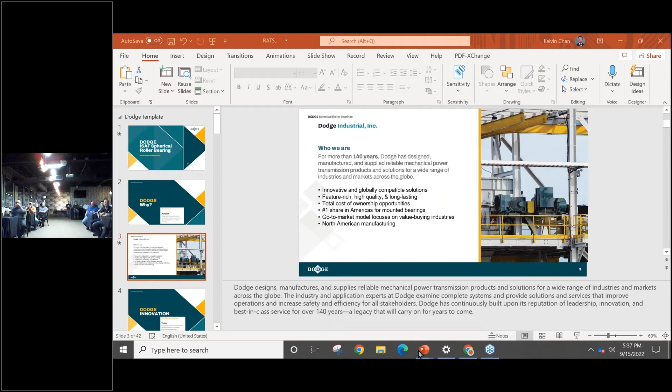Oh, we're gonna have some fun tonight. Bear with us for a second here. Okay. All right, that's better. Yeah, sure. I think it's on. It's on. So

This is who we are, and one important factor that really has to be stressed in the last few years is we're North American manufacturing. In fact, a lot of our plants in the US are within about a 2-hour driving radius. So that allows the plants to share knowledge, to be able to share equipment. And the majority of our products are sourced in the United States as well. So there's very few components that we have to put on a ship and bring into the US.

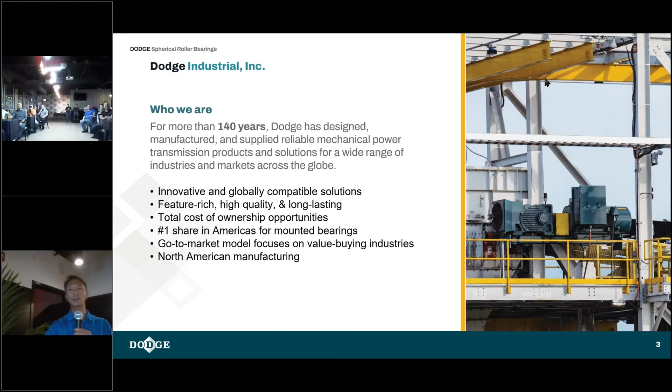So in the past couple of years, that has meant a lot. It's allowed us to be really prepared for some of the logistics issues that have occurred in the past couple of years. So we really take pride in the fact that we are a North American manufacturer. The other thing that we want to do is innovate. And this is another core belief that we have. We're always trying to improve products, yes, but we're also improving systems and ultimately offerings for our customers. And the goal again is our customers. We want them to perform at the highest level possible.

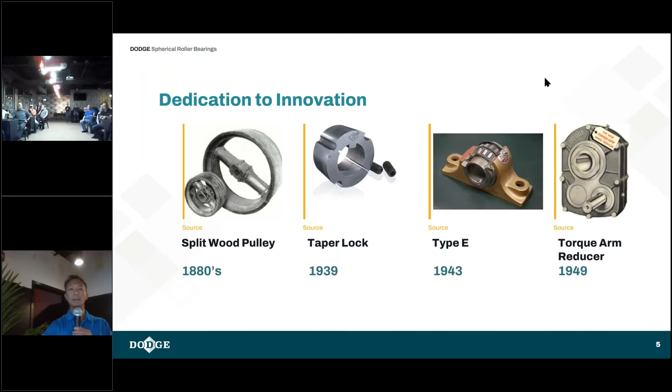A couple of the innovations that we've had over 140 plus years time span: Dodge created the first split wood pulley back in the late 1800s. And then in the late 1930s, we created the taper lock bushing. You see this in every sort of belt drive application throughout North America and around the world. So it's a really familiar product. In the late 40s, we created a shaft mount gear reducer. And on into the 60s, we created one of the first rubber tire couplings.

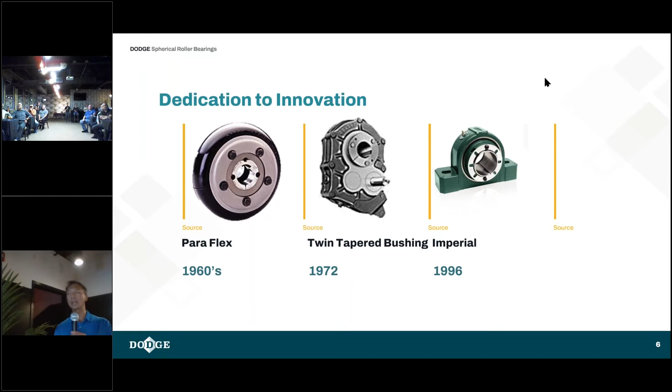And not to sit on our laurels, you know, we make a product, we introduce it, but we continue to improve it. So in the 1970s, for the gearbox that we introduced in the 1940s, we created a twin tapered bushing locking mechanism. So it allows you to take the shaft off really easily or install it. And then in the late 90s, Dodge in-house developed a new locking device for bearings, and it was the Imperial lock. And that's what we're going to talk about tonight.

In the past decade, we've introduced other products focusing on specific industries like the food and bev industry, requiring higher demand for safety and cleanliness. And we've even improved on our Imperial bearing that we came up with in the late 1990s by making the safety mount. And again, we're going to talk about that this evening as well. And not to say that Dodge is completely a mechanical company. We've dedicated resources to producing our smart sensor, which is a condition monitoring device.

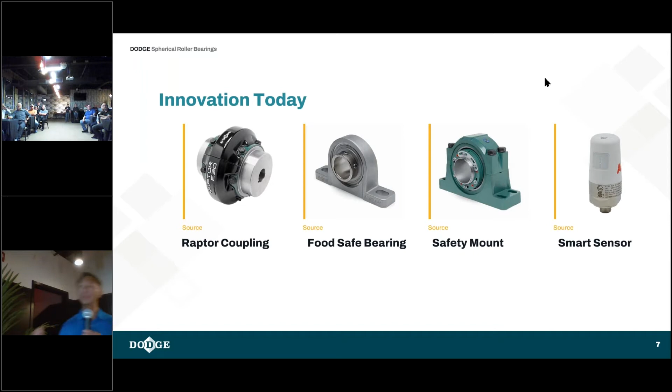And that's our entry into the Industry 4.0 sphere. So our spherical ISAF, what is it all about? Throughout your facilities, you'll see a fairly common bearing. It's called the SAF. It comes in multiple pieces. It's assembled on site. There's a lot of interchangeable parts with many different manufacturers, so it makes it easily accessible to the masses. But Dodge, we found a different way of approaching the same problem.

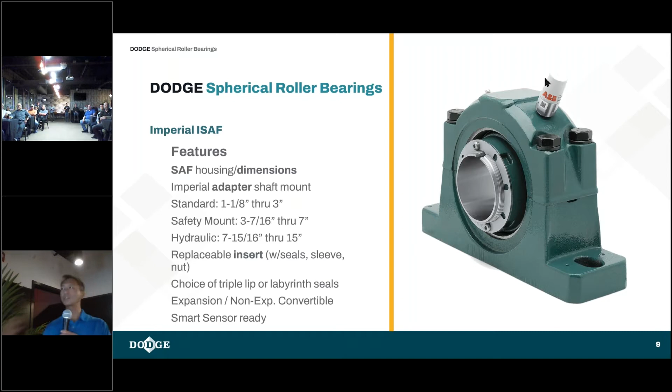So with the SAF, the ISAF, it's the same footprint, so it's drop-in. We've introduced that Imperial adapter shaft mount to it. We have a full range of shaft sizes that we can work with. And the difference in the product is it's insert base or cartridge base. We're going to get into that a little bit later on here. So I'm going to present 5 really good reasons that you would actually consider the ISAF mounted bearing.

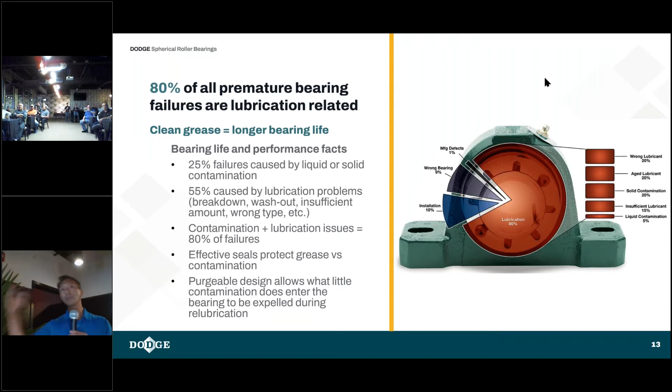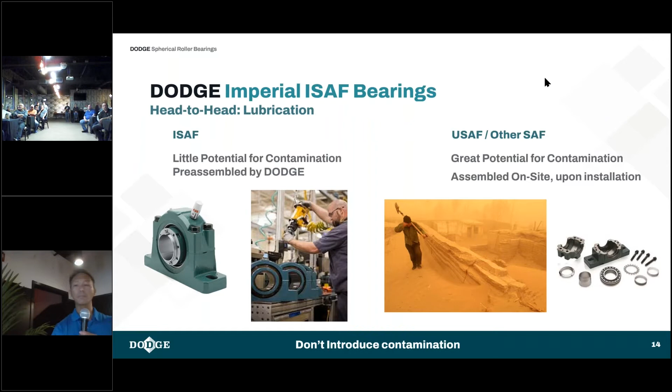Well, is this the environment that you work in? Does this look familiar? Maybe a little bit of an exaggeration, but not necessarily in some places. You have an open bearing you're working with here. So you're packing grease in that environment. What do you think is happening? You're introducing contamination from day one. Now, wouldn't you rather have something that just ships completely sealed, ready to go from the factory? And that's what the ISAF is.

How do we do that? Well, we want to not introduce contamination, number 1. Here's the other step. We want to prevent contamination after installation. Every bearing manufacturer lives and dies by their seals. And this is Dodge's approach. It's a triple lip seal plus a flinger. So that basically means 4 barriers of protection that restrict contamination from getting in. And in addition, there are other options for seals as well.

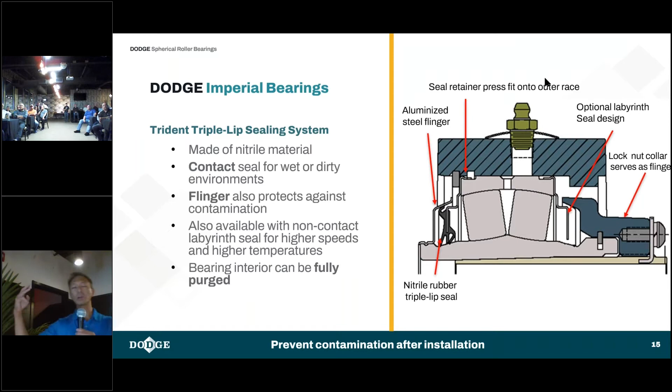But with this particular design, what we're trying to create is a grease dam. So you have these 4 barriers of protection plus the grease that you're gonna pack in here, right? So really the 5th protection is that grease dam. So you want to make sure that grease dam is clean, right? So now what's that 3rd thing that we have to do to prevent contamination? You got to find some way of actually purging this. So how do we do that? Well, in this graphic, you're going to see the difference between an SAF and ISAF in how contamination gets in or gets out.

So in a traditional SAF, what you're looking at here is the housing of an SAF. There's a massive cavity on either side of that bearing inside there. So when you're pumping in fresh grease, it's a shell game. You're actually just moving the contamination over into this cavity. And then to add a little bit more pain, those LER seals are grooved. So you're moving more contamination into the groove now. So as you can imagine, how much contamination are you actually pushing out of this particular type of bearing?

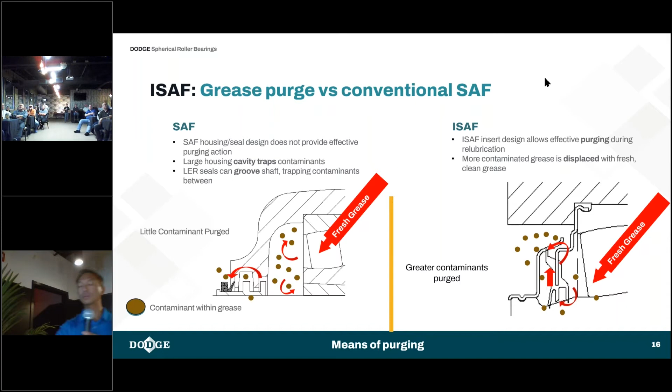Now, compare that with our ISAF. So it's insert base. When you purge grease, you notice the shape of those seals are fairly unique. It's a one-way street here. We're pushing grease, it goes out with the contamination, and everything that's going with that grease is purged out. And that's what we want to do to properly maintain the life of that bearing.

So how is it that we can do this? Because as you can see in this picture, you can see that grease being purged out. It's rotating. You know, that's pressurized. We're actually using some means of pressure to actually push that out. And normally with a lot of bearing seals, you apply pressure to any seal and it's popping out. That is traditional seal design. Why does this happen with Dodge and that seal is staying intact? It's not popping out. Why is that?

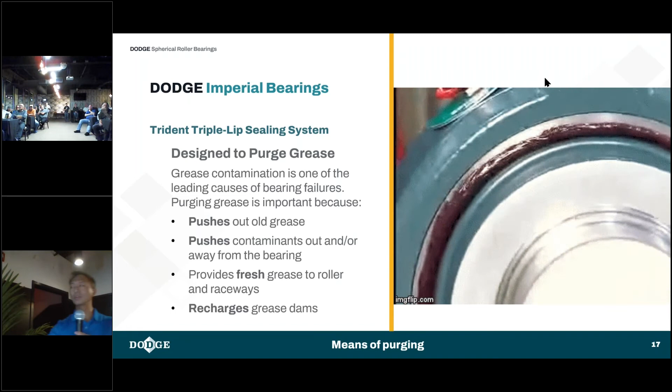It's because the seals are mechanically retained. So no human hand is actually touching that to insert that into the housing. It's a robot that does that. It pinches the seal so that you can apply whatever normal pressure that you would, a grease gun, an auto lubrication system, whatever it is, you're pushing that grease out with its contamination. You're getting that fresh grease, and you're getting that fresh grease dam as well. So those are three things that are related to lubrication that really restrict contamination with our design.

Oh, by the way, let's talk about how much grease you're going to use. The factory knows how much grease fills that insert, and they're going to get exactly the right amount all the time, right? So in the field, when that SAF bearing is open, what are you doing with the grease? So you're buying 5 times the grease to actually pack this thing in that exposed contamination-based environment.

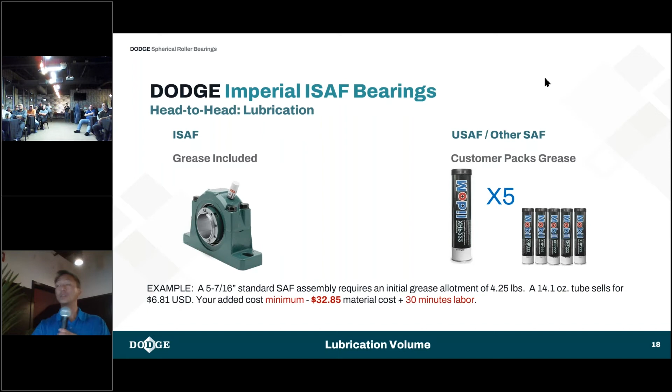And you know, the funny thing is, I would hope the first thing that you do after you pack all that grease with all that crap is you're purging it out. Does anybody do that? That's not the first step. So realistically, you could be spending 10 times as much grease to actually make sure that you're doing it right. So what other things should you consider an ISAF for?

When that panic happens in your plant and you're scrambling for these parts, you will work with anything you want, right? Or anything you can get your hands on, right? So you're going to get a mishmash of all sorts of different manufacturers. So there's an inherent risk in doing that, where you can't be confident necessarily in all the components that you're choosing to be part of this bearing assembly.

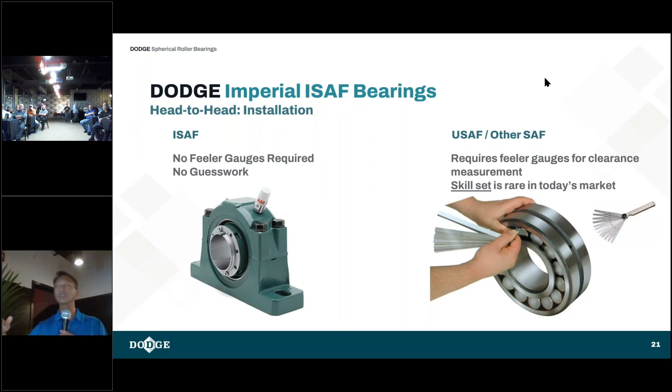What's another good reason? How about this? It's easy to install. You guys know what feeler gauges are? How many of you have actually worked with feeler gauges? Yeah? You have a skill set. If you've worked with feeler gauges, you have a very particular skill set. And it's an absolute rarity to know how to do this effectively, properly, right? So ISAF bearings, no feeler gauges. You don't have to stick those feeler gauges in here. I'll show you how to take the clearance out of these things.

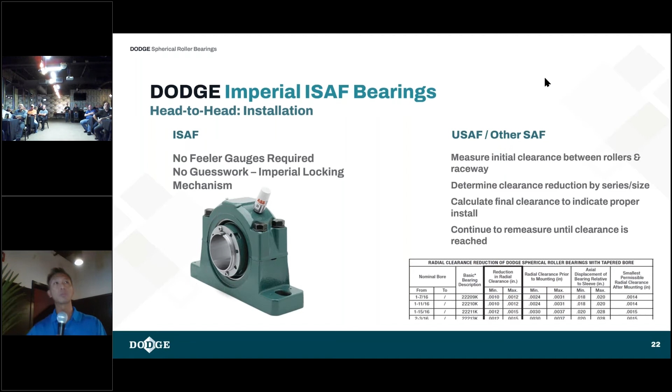These are the steps. There's 4 steps to making sure that you take out clearance, check the clearance, etc. And these 4 steps, you may have to repeat them, right? If you don't get that clearance out, you're going to have to repeat this, right? And as the bore, the shaft size gets larger, it gets a little bit more difficult to do this process. You require more people, you require more time, right? So how do you install a Dodge ISAF?

Turn something clockwise. That's it. That's all you're doing. In fact, you're hand tightening it to a 0 reference. And then I have a chart that tells you whatever diameter it is, you put it through a couple more turns, either with a spanner wrench that has leverage or a hammer and drift. That's how you mount it. No feeler gauges. This actually takes the clearance out, sets it for you perfectly.

And how does that happen? Well, if you focus on the blue wedge there, when you hand turn it, I don't know if the graphic's going to work for me today, but when you hand turn it, oh yes, it moves, right? It pushes.

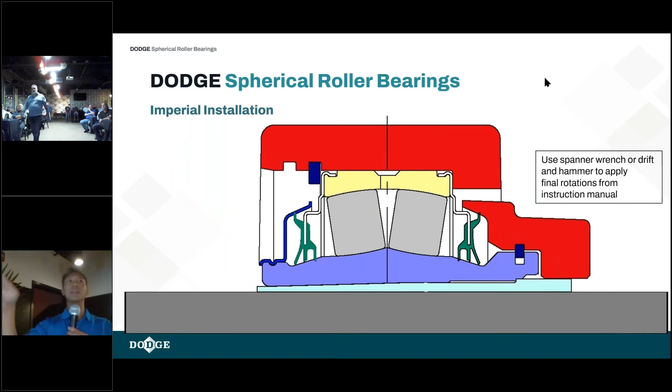And then when you use that spanner wrench or hammer and drift, you're locking it into place. Oh, see what happens? Okay, we'll back it up here. So what happens is it pulls. So that's why we call this a push-pull adapter. That effectively sets the clearance for you. You don't have to worry about feeler gauges.

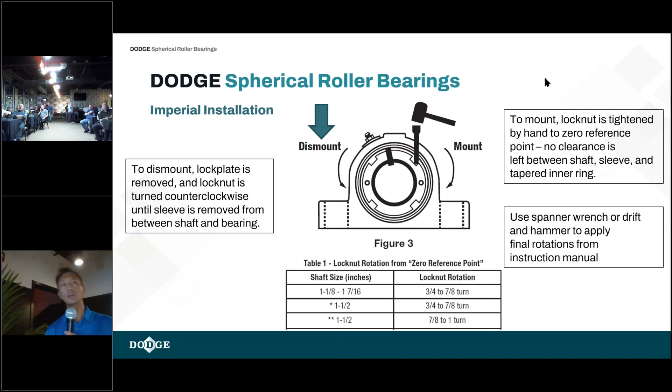Another good reason: just as easy as it is to mount, it's easy to dismount as well. With traditional SAF bearings, there's a real challenge with dismounting these bearings. So how do we do it with our ISAFs? Counterclockwise, same process. This is one way to remove an SAF bearing. Don't know if the sound will go through, but

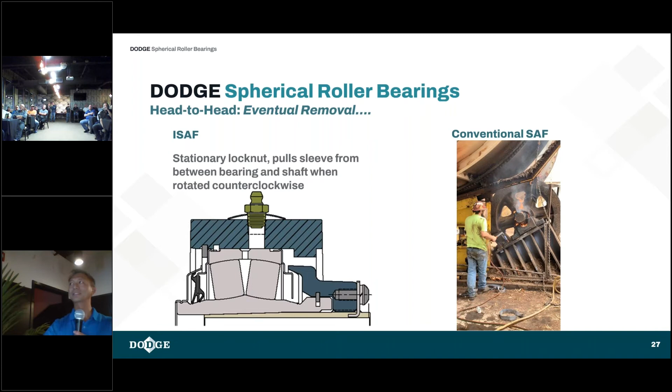So how many of you have actually seen that before? Yes? Winner. Yeah, you may have done this yourself. In a facility, what does this require? You're going to need some sort of permitting, right? This is hot work, right? You're going to need time. You're probably going to need a new shaft after you do this, right? So look, with the ISAF, this isn't how you dismount. This is a lot easier to work with, right?

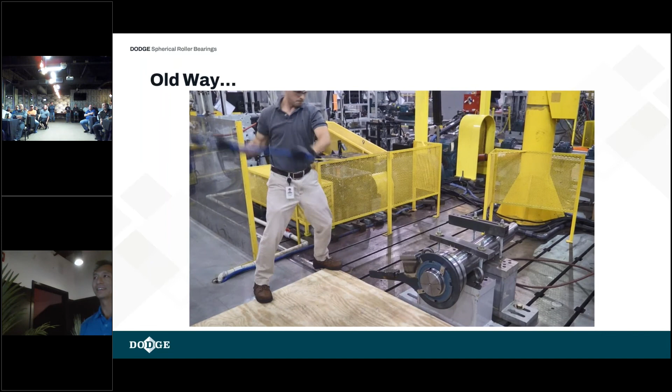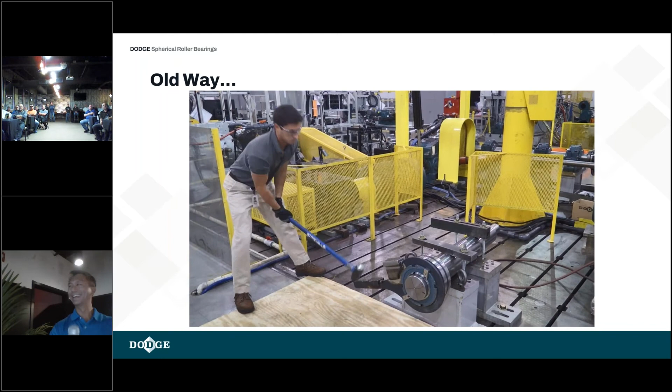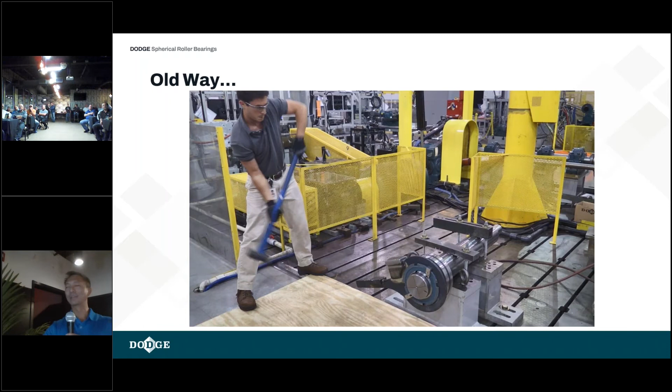Here's another nice little video you can see. Have you seen this? That's too painful to watch completely, so we'll just cut it short there. This is another way of unlocking that adapter from that shaft, right? That's usually the first resort before you take that torch out.

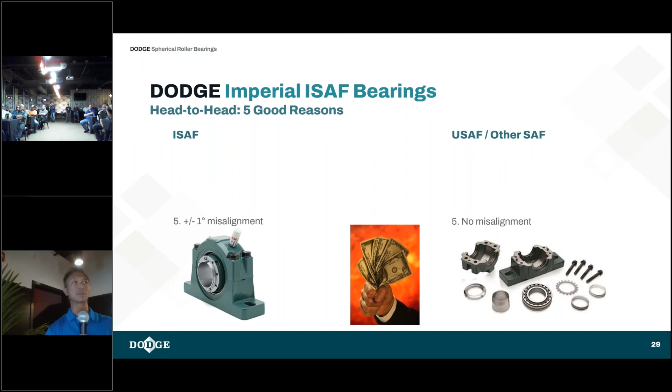Another good reason I'm going to share with you. Last one. This is about misalignment. So with the ISAFs, there is plus or minus 1 degree of misalignment. We all live in a perfect world. No such thing as misalignment, right? Right. So when you're working with an SAF style, there is no capability for that seal to handle that misalignment.

So the difference with the ISAF is that seal is contacting 100% all the time, and it's an insert cartridge that moves with the shaft. So does the seal. It's moving with the whole insert. So that's where that misalignment capability comes about, right? With an SAF, you can go a little bit off kilter. Now you're depending on the seal to deform in a way it was never designed to handle. So that can be dangerous, right? You go too far and that seal just opens up, right?

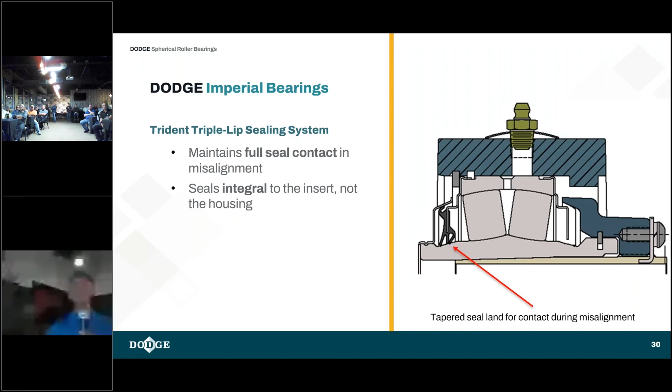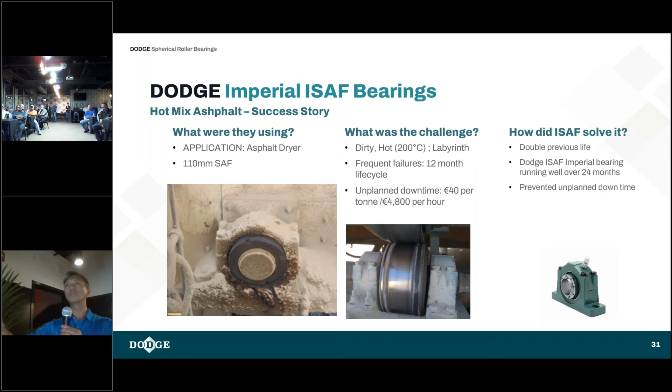But in this particular case, there was a 12-month life cycle for this bearing. And what did that cost? It's 40 euro per ton, which works out to about 4,800 euro per hour. What did ISAF do for them? They doubled their previous life. That means 24 months plus. And of course, they prevented any sort of unplanned downtime because they weren't sure when within that 12-month cycle that SAF bearing was going to fail. That's where good condition monitoring works, right?

So is there a way that we could improve this design? Why would we need to? Would we really need to? This is the third core principle that Dodge has. We make high quality products, yes, but we want to do it in the safest possible manner. If we can increase the safety level of that product as you're installing it, we will find the way. And this is what we did, because, remember our buddy here with the torch?

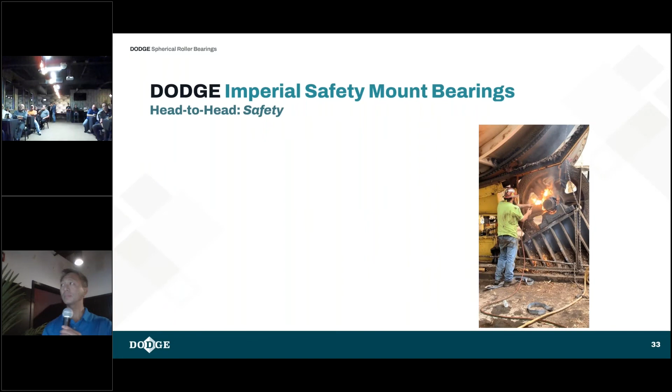Even with our locking mechanism, the Imperial locking mechanism, you are still using a hammer and drift, right? Or a large spanner wrench, and that can be dangerous too, right? You're causing potential sparking when you're actually hammering the locking mechanism down. So there's an inherent risk as well, just like an SAF.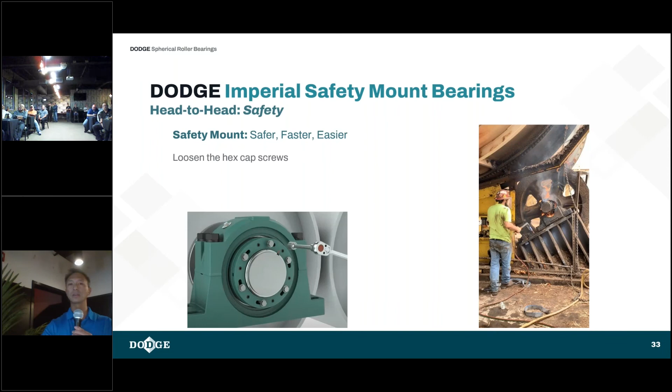So what we've done at Dodge is find something that was faster, easier, but also safer. And lo and behold, we're just using hex caps now. No spanner wrench, no hammer and drift. So basically it's tightening and loosening hex caps. It's the same SAF footprint. It's the same replaceable insert.

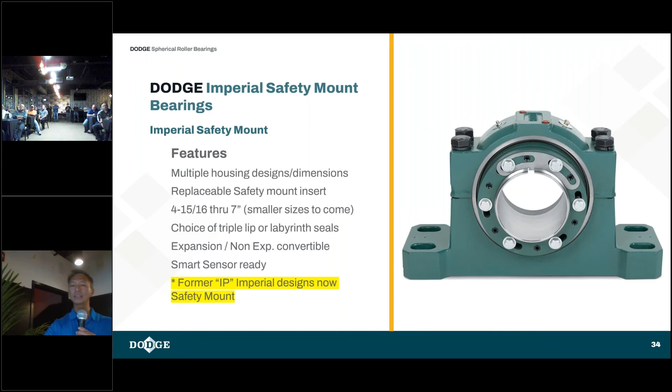It's the same seal system that we're using, except instead of having to deal with that hammer and drift or spanner wrench or any sort of blows, what you're working with is a hex cap system. So these ship with these hex caps attached. So what you're doing is you're basically hand tightening it, just like our normal Imperial adapters. You're marking alignment, then you loosen the hex cap bolts.

But you notice it's an integral nut. So you're basically moving it to the other side of the slot, and then you're tightening it after that using torque. So it's a really simple system. And when you're dealing with diameters of like 4 and 15/16 to 7 inches, it's not massive, but it's still a good size. You need a lot of leverage or a lot of hammer blows to turn that locking mechanism.

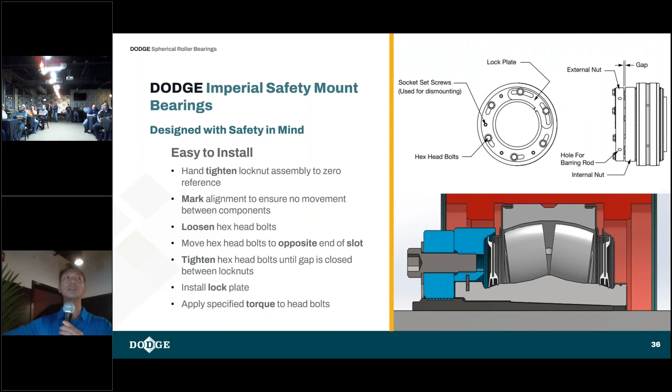So this safety mount does it a lot easier, safer, and to dismount, you're doing the opposite. You're moving the hex head bolts, but we also have jack screws. So you're disengaging the external nut from the internal nut. Makes it a lot easier, and we're giving you an assistance here to actually help out with that. So this definitely is about safety to ensure that no one's getting hurt at the end of the day.

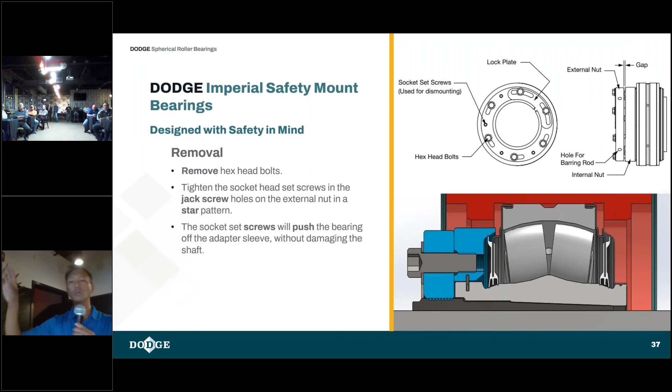Can we improve on that? Okay, what happens if you're dealing with a shaft diameter of 7 inches to like 15 inches? How do you deal with something that large? There's some pretty serious work to be done on that. This is why we introduced the hydraulic ISAF. So, same idea, except hydraulic pistons is what we're using. So you're hooking this up to a power pack to disengage the locking mechanism or engage the locking mechanism, whichever you're doing.

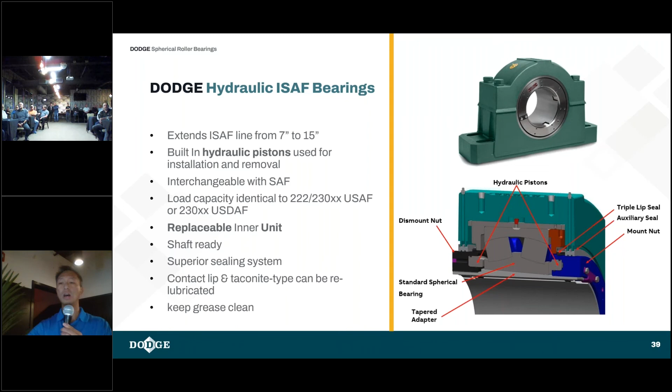So the safety mount, this hydraulic ISAF, they're all the same in the fact that there's no feeler gauges again, right? They're replaceable inserts. That limits your critical spares. You don't have to have the whole block sitting on a shelf. Now all you would need is the actual insert. So that ultimately reduces your costs and reduces your inventory.

Here's a really nice success story from CSX. This is a loadout facility in Toledo. It's an iron ore loadout facility. So they were using SAFs, and the installation time was 48 hours. You can imagine that. And they had challenges setting clearance, bearing failures, things like that. And how did they actually solve it? Well, this is one of those success stories that I like to read. I'm gonna read verbatim what this Ron Davenport said about this installation.

He said, keeping the bearing from being contaminated in the outdoors is nearly impossible. Would you agree with that? A bearing changeout never seems to happen on a nice day. It's usually raining or snowing, and that makes it tough on the team. Plus, you really have to know what you are doing, especially understanding how to set the tolerances just right. We spent a solid 48 hours changing out that bearing. Not only is it a fight to get a failed bearing off, but the bearing also destroyed the shaft. So it had to be changed out as well. That's when I seriously began considering using the Dodge hydraulic ISAF bearing because I knew there had to be a better way. And just maybe this was it.

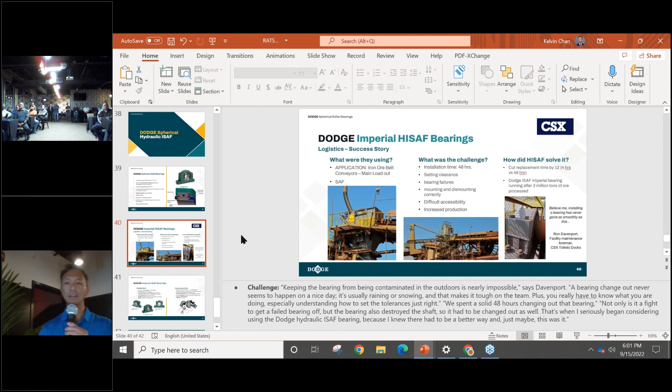Oops. There we go. Sorry. So those were his words, not mine. It's printed, published. I read verbatim what he said. And this is his conclusion here. It says, believe me, installing a bearing has never gone as smoothly as this.

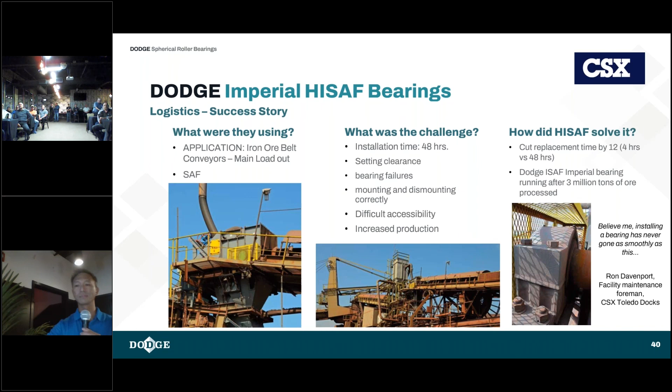So what have they been able to do with this bearing? So remember 48 hours, right? 48 hours to install this thing. They cut it down to 4 hours. So that's cut by 12. Did it work? Yeah, they moved 3 million tons of ore already with this bearing in place. It worked. So just a quick summary, why would you consider ISAFs?

Well, it's one package, not 100 different part numbers. It's factory sealed. You cannot introduce contamination into this system. The amount of grease that you're using would be excessive for the SAF versus the ISAF. The factory knows how much to put in it perfectly. And the actual seal system is really what shines in this because it's purgeable. It prevents and it allows you to refresh as well.

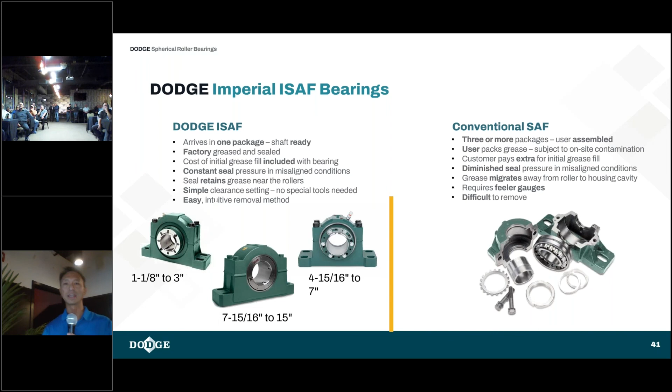And the big thing here, feeler gauges. No more feeler gauges. So that being said, it's easier to install and easier to remove.